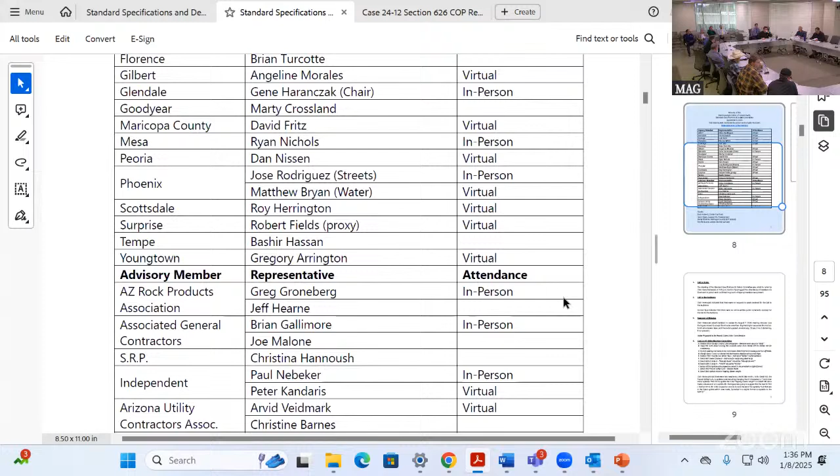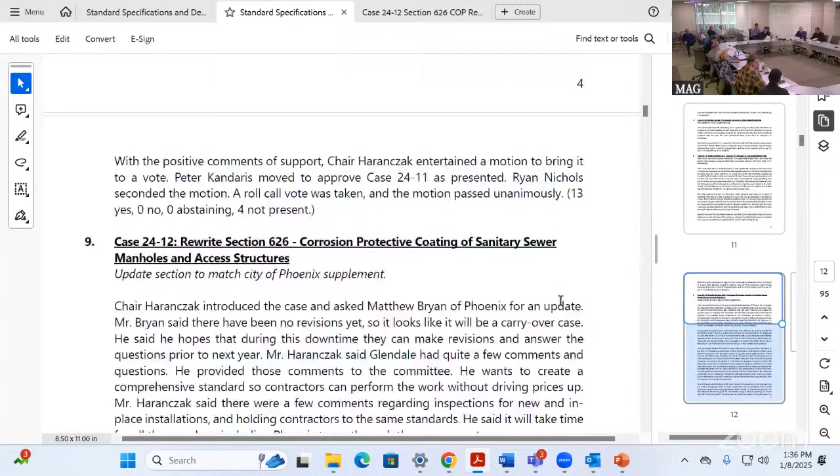Thank you, Gordon. It was brought to my attention that we do have a few new people that have never been part of this committee before. Robert Fields, are you on the line? Do we have a surprise here?

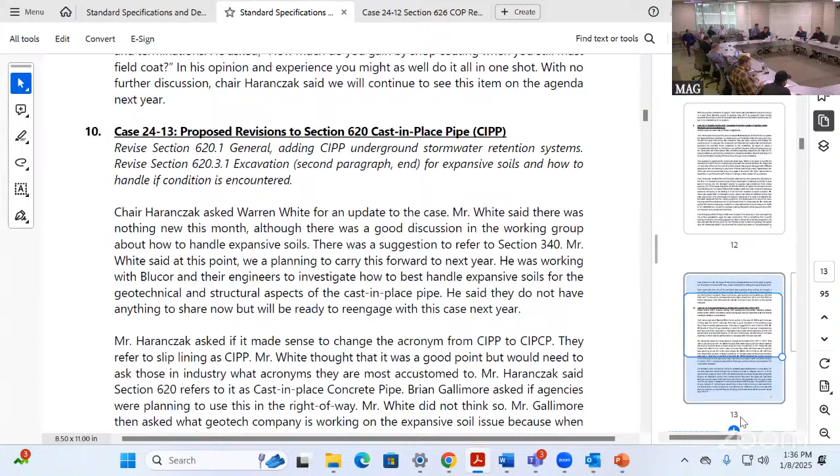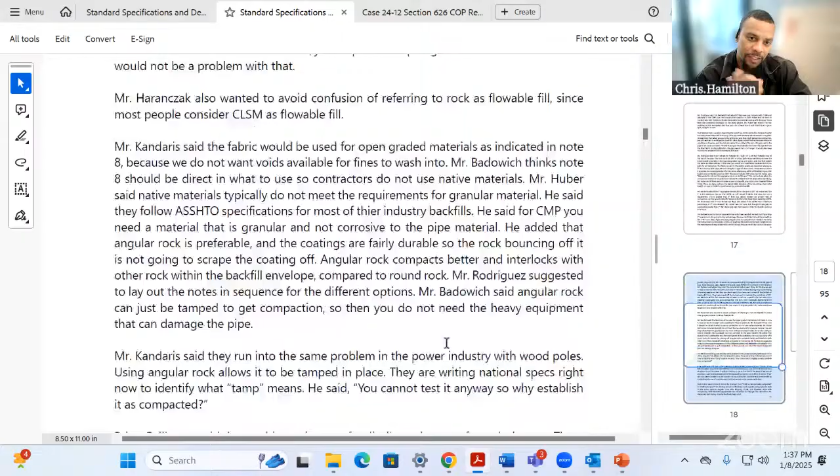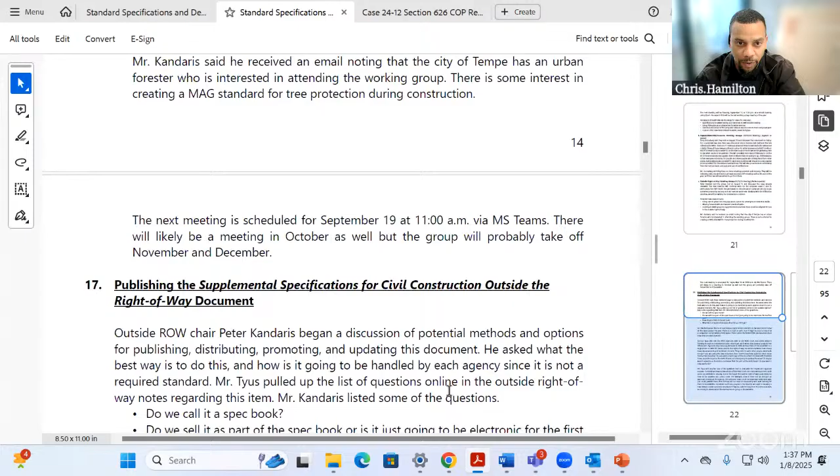How about Chris Hamilton with Tolleson? I am here. Chris, you want to give yourself a quick introduction? Sure, I am Chris Hamilton, city engineer here at Tolleson. I've been here about 3 years, but I've been around the transportation engineering community for quite some time. Previously was not a part of this committee, but worked closely with Mr. Badowich, who's been on this committee for quite some time. All right, thank you, Chris. Welcome to the committee. Thank you.

And then Arvid, you have an alternate, I believe. Robert is your alternate. Does that ring a bell? Robert? That's me, yeah, I'm Robert Pizzorno. Robert, you mind giving yourself a quick introduction? Absolutely, my name is Robert Pizzorno. I'm the Government and Community Affairs Manager for Tilson. We do fiber optic cable deployments, but I also sit on the board of AUCA, and that's who I'm with, Arvid, is AUCA representing that group. Great, thank you, Robert. Welcome to the committee. Thank you.

All right, hopefully everybody had an opportunity to look at the meeting minutes. Are there any corrections or questions that committee members may have on the meeting minutes? All right, hearing none, I'll entertain a motion to approve the meeting minutes as written.

Mr. Chairman, Jose Rodriguez, I move to approve the minutes. Thank you, Jose. How about a second motion? Mr. Chair, this is Warren White, I will motion to approve as well. Thank you, Warren. All right, we'll move into a roll call vote.

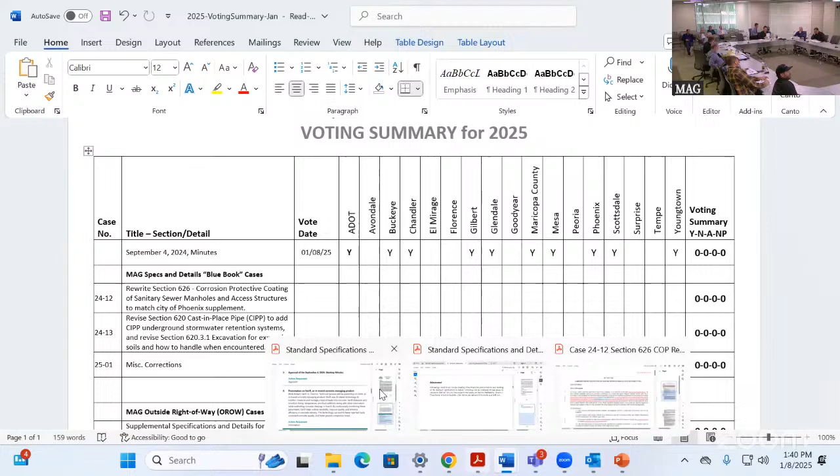Looks like the motion passes unanimously. Thank you, Gordon. Thank you, everyone, for attending this meeting, I appreciate it. We're going to move into agenda item number 4.

This is a presentation on Verifi in-transit concrete management product. I'll go ahead and I'd like the Verifi guys to go ahead and introduce themselves, or whoever's going to be providing the presentation. Good afternoon, everyone, my name is Mark Roberts, I'm the Director of R&D for Verifi.

Can you go to the next slide, please, Gordon? And the next one, we'll just skip that. The reason why is that the realities of concrete quality control are very difficult, right?

So what you have on the screen here is the new bridge that's going over the Hudson River in New York City, or north of New York City. It was a huge project. 182,000 yards of concrete was poured. This project actually won an award for its QC program, testing 1 out of every 20 trucks for how good the quality of the concrete was. In general, that is an exceptional amount of testing done on concrete.

So the idea for Verifi was to make it so that you could increase the amount of testing you were getting, the amount of information you were getting on every single load of concrete, instead of relying on spot checks or even a dedicated QC program. What that allows you to do is have more information across all of the loads of concrete, and know exactly what's happening to everything.

Just go to the next slide, please. So the idea there was to build a computerized system that you would mount to a concrete truck that would basically monitor, measure, and manage said concrete. Monitor would be like where it is, how fast the truck is going, GPS, that kind of thing. Measure was the complicated part, in that you are actually measuring the quality control of the concrete.

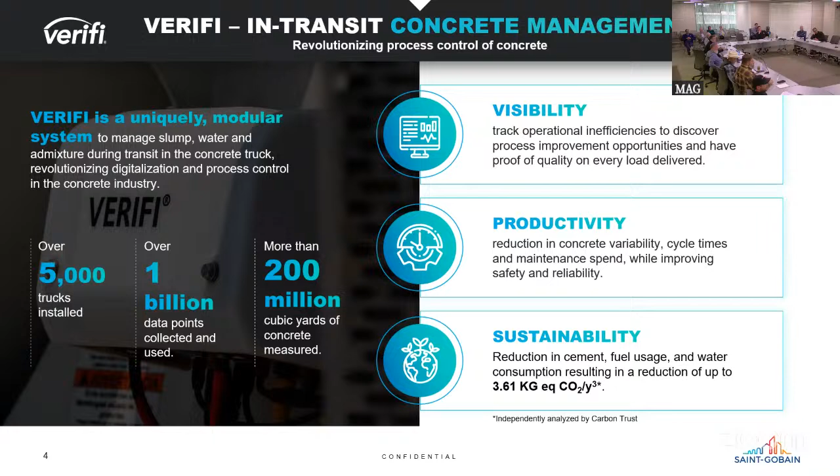How we did this was we built a system, like I said, that is a computer on a truck that is outfitted with many sensors to measure the quality of the concrete. Those sensors put out outputs, and it's connected into other systems that our concrete producers already have, like batch and dispatch. Basically, the recipe of the concrete is being given, and what is being made is on the top right-hand side.

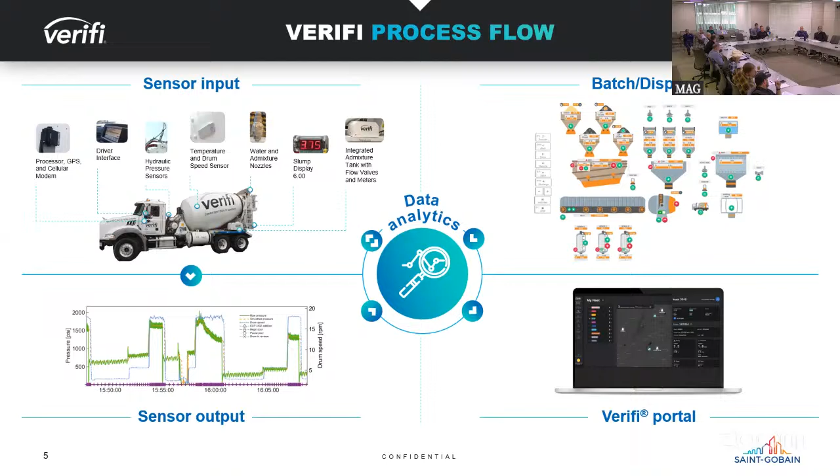And then you're actually using the system to measure what's actually happening when you make that recipe. Currently, they make a recipe and expect it to taste the same every single time. And we all know, as anyone who's cooked a meal, it's not always the way it works. So this allows you to test effectively every single load of concrete. Just go to the next slide, please.

So, like I said, it measures and manages concrete. That measurement was a difficult thing to do, but managing is also very difficult. What that allows it to do is add the correct amount of chemicals or water needed to make that concrete hit specifications. So having the ability to add those fluids on board allows you to have complete control.

Instead of making concrete and then shipping it and having it delivered, you are making concrete the entire way it's being delivered to the job site. So it extends the time at which you can affect the concrete's quality all the way to the job site, and then on the job site until it actually pours out.

Why you care about that is traffic can be extraordinarily variable, and concrete has a very low shelf life product. Think of concrete as a shipping industry with a product shelf life of about 90 minutes. The difference between 5:30 in the morning and 7:30 in the morning on traffic around here, at least in Boston, is a ridiculous difference. So you're shipping from the same plant to the same location, and it can change the timing and therefore the quality of the concrete.

If you can manage it the entire way, you're affecting that concrete all the way to the job site, and you're having the same quality every single time.

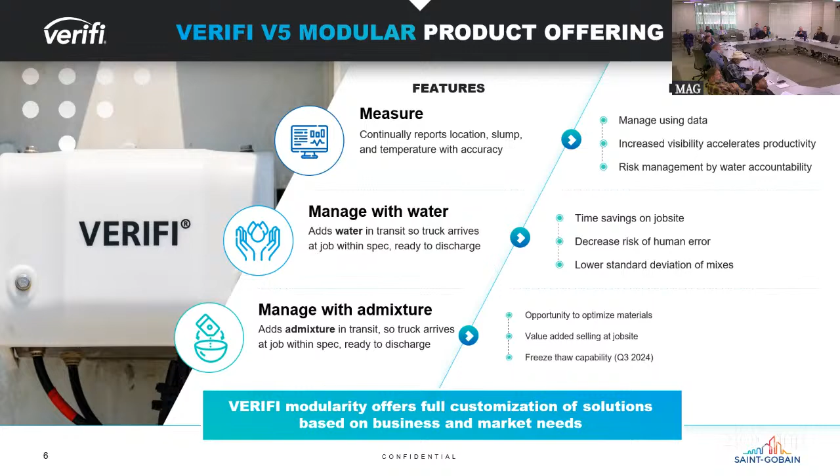Make sense? All right, this is the systems that are on there. We have...

Two different displays. If anyone's seen concrete being poured recently, there's a lot of trucks in the Phoenix area that have the system on there. If there's red numbers on the back of the truck, that's the Verifi system, and it's giving the display already. We have a display for the driver so he can interface with the concrete after he's arrived at the site, so he knows what's going on, and all of that information is collected and sent to the cloud so others can look at it. Anytime, anyone can look at the quality of the concrete across history, whether it happened two years ago or is happening right now, they can see it.

Go to the next slide, please.

So this is where the super nerd in the room gets going a little bit, I apologize. This is where it gets a little exciting. To do what we're talking about, you have to use this idea called rheology. Rheology is basically the study of how materials or liquids move.

Concrete is getting much more complicated. I'll say that as someone who's been in the concrete industry a long time, because we're trying to do really new things with concrete that you couldn't do before. You can do underwater concrete, you can easily get 10,000 PSI that when I started would be very hard to do. And you're trying to get more sustainable, so you're reducing cementitious contents or replacing them with other supplementary cementitious materials. All of that means the level of complication is increased dramatically.

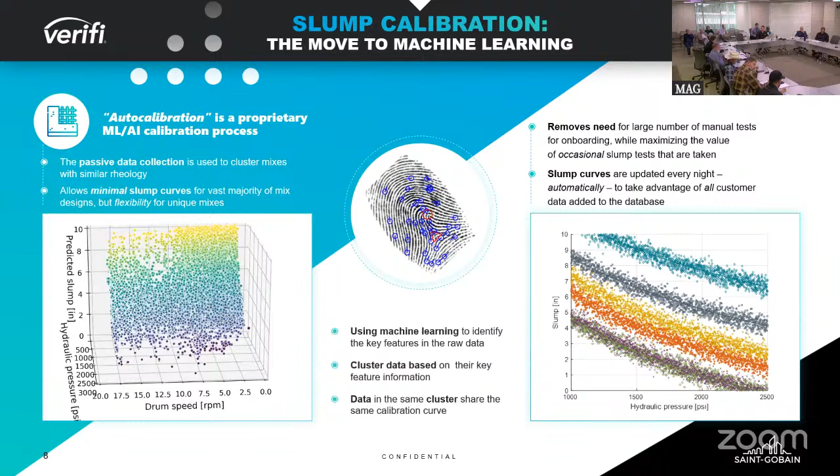Right now, how concrete is managed is the slump of the concrete, which is how the fluidity is consistently going down. So what they'll do is they'll bring the fluidity really high, and then they'll let it drop, and hope it's within target when they arrive on site. And then they pour out.

Or they'll add water, or they'll add chemical, and then they'll pour out. When you use Verifi, it's a very different idea in that since you have that whole time of being able to affect the concrete, you bring the concrete slump up, and then as it slowly starts to drop, you add a little bit more fluid as you go. So you maintain it, so it doesn't matter how long the commute is. It's always right from the get-go.

And once you have that data, you can actually start to look at how, when you're too high and when you're too low, and all things like that. But that reduction in variability basically means that what you're putting into the structures that you're in charge of, you have complete control over what it is. And it comes out as it's designed to be every single time.

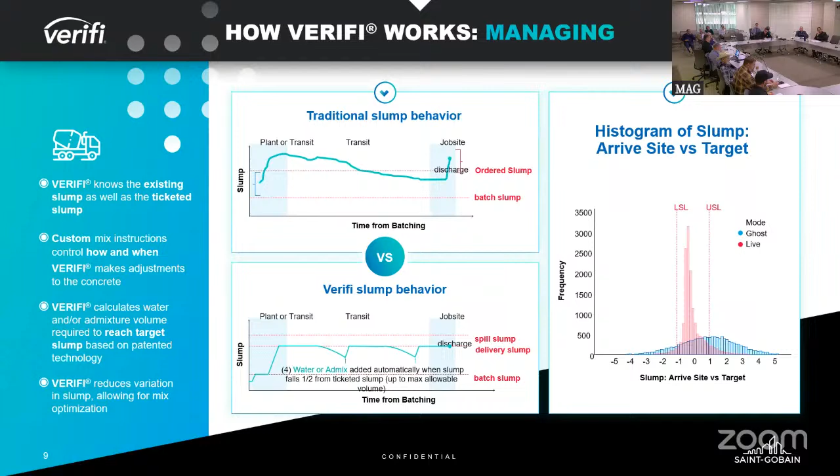Next slide. I've been in this industry for a long time, but I'm at an interesting intersection here, where we have material scientists that work for Verifi as well as IoT people. So that's like data nerds and material science nerds. And we also have people who have been working in the field, like the people in the back of the room, who know concrete really, really well and what our customers need. So putting those three things together was what launched Verifi to be able to actually do what we do.

Now I will say it has completely changed because of the amount of data that we have. Machine learning and all those things that you hear about AI and all the stuff that you hear about in the world, it relies on data as oil. Machines don't run without oil. AI does not run without data.

We are producing that data to be able to make the systems better every single day. So it automatically feeds, and every single night it's actually updating how to measure the slumps on every truck that we have it on. It easily does it with no human intervention. It's learning and it's fixing itself every single night.

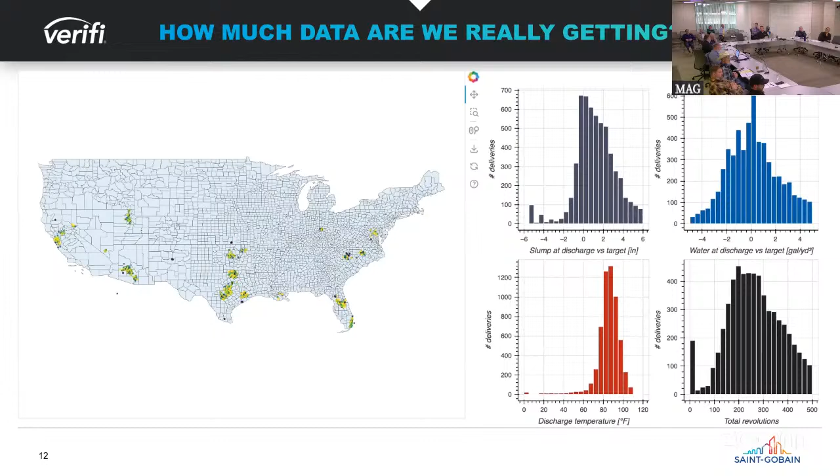So they originally wanted to test every single load of concrete for slump. And that was causing them to have a long time because they had to have testers there doing these tests for every single load. And they had to throw away a lot of concrete. This is a really big project.

In wheelbarrows of concrete, they were going to throw away 18,000 yards of concrete individually pulled off, which is a lot of material waste, a lot of CO2 waste. So they contacted us to ask, can you replace this physical testing with a machine? This is where we already had the system, so we worked with them. Now we're no longer testing every single load of concrete, they're testing every 20th load. So they've gone to 1 in 20, the same as the Mario Cuomo Bridge, but they have the other 95% of the information already in a data source they can trust and use.

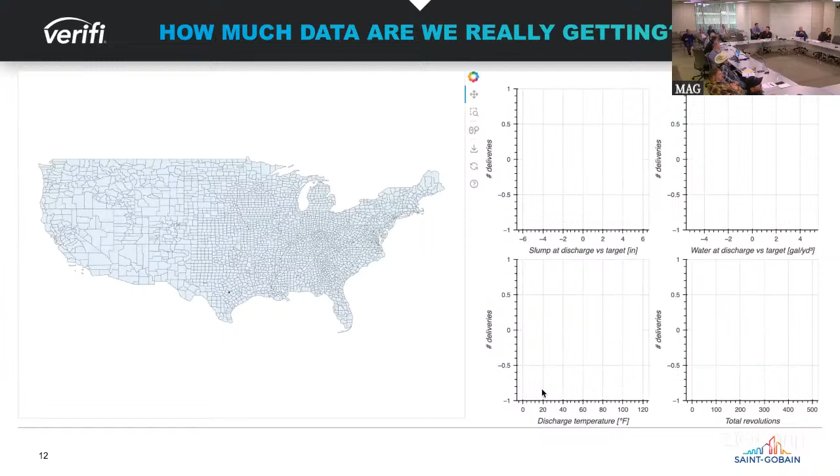I was told to keep it to 15 minutes. That is 15 minutes. Well, I'd like to grant you some time to discuss the one slide about slump. You said something about nerding out on slump. Yep, go back up one more. You intrigued me with that.

This is the ASTM used to measure slump. There's a precision document that comes with that. Basically what this is saying, on the bottom right-hand side, is a multiple laboratory precision. That means if two people pull concrete from the same wheelbarrow, not the same truck, that is the difference they're allowed to see between two results. It's called the D2S limit. The fancy way of saying 95% of the time you'll be within 2 standard deviations, and the standard deviation is on the bottom left-hand side. What it's really saying is if someone pulls a 6.5 inch slump and someone else pulls an 8, that is an acceptable difference between the numbers.

I bring this up because what happens with us is we are a digital display and it says 5.25 on the side of the truck. And then someone pulls a 5 and they say, you're off. And I say, well, no, because who's off? One, is it off at all? There is no such thing as a difference. So that basically shows there is no technical difference between a 5.25 and a 5. That's literally measuring this much out of a 12-inch cone. So it's not a big deal. I bring this up a lot just because it does allow for a lot of discussions to happen.

What I will say is a machine is a machine. It's like the Terminator, it does it every single time the same way all day. Doesn't matter if it's 5 o'clock and it's Miller time on a Friday, or it's Monday morning, it doesn't care, it does it the same way every single time. Humans are, let's just say, less reliable.

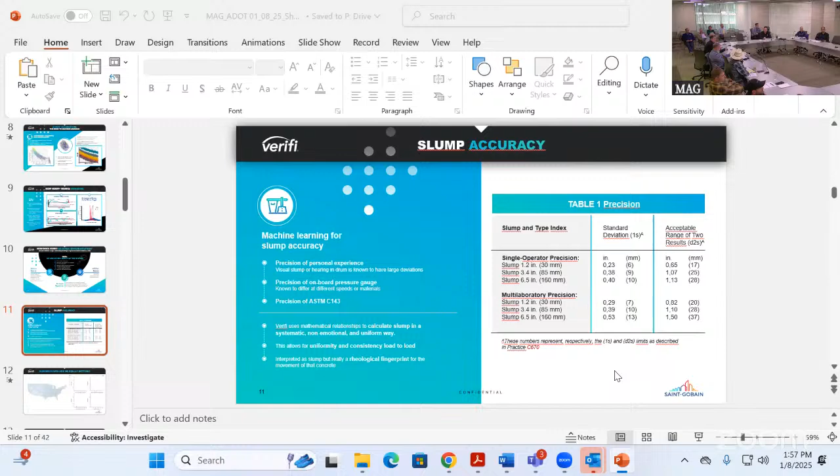We have APIs, so actually, if you go down 2 more slides, sorry to do that. We have APIs, which are basically how computers talk to each other, so you can just get the information that way if you need it. But there is also a slump display on the truck, on the side, and it says it right there, big, bold, 3-inch tall, 4-inch tall letters. It's a 100% replacement of the hydraulic slump meter. The hydraulic slump meter is a great idea that has a really big flaw, in that if you speed the drum up a little bit, that number moves. And then you have to say, okay driver, is it exactly at 3 RPM and all that? It's very, very difficult. So this takes that into account.

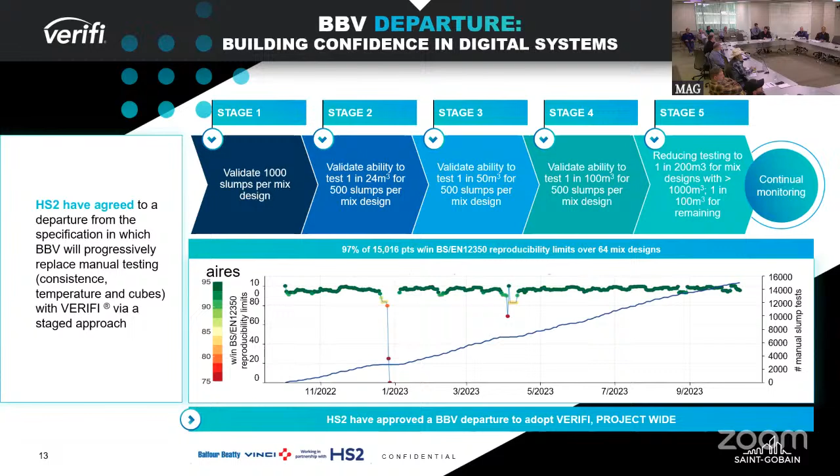The truck's displaying slump only, but all the other information is available through an app or through that supplier. To your knowledge, to date, in Maricopa County, what suppliers are using Verifi?

Cemex is using it. Arizona Materials is using it. Core is using it, and Desert Ready Mix is using it, and soon to be Rock Solid is using it. Some big names in there. Congratulations.

About 70% of the market is using it. The question was, what percentage of the market was that? And the answer is 70. My question is, how much more does it cost for the contractor?

It usually gets passed down to us, you know. So for one, we sell it to the ready mix producer. They usually save enough money without passing that cost on to others. There's a lot of value in operation savings because they have visibility across the entire operation, so they know which drivers are taking their extra time, things like that, so they can save a lot of money in both operation times and in quality control.

So you were talking about adding additional fluid and whatnot throughout. I assume that's during transit, you're adding fluid? Yep, and it's automatic, so it's an autonomous system, the Verifi will add the admixture or water that is required in transit while it's driving. The trucks can have that.

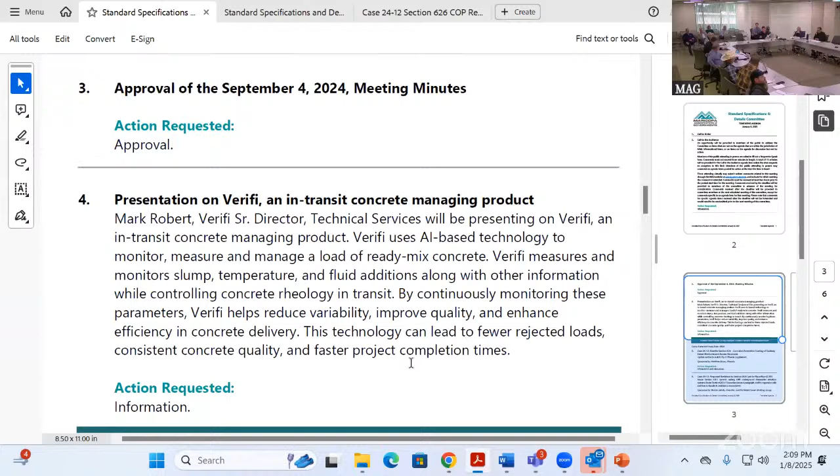All right, we're going to move into agenda item number 5, cases carried forward from 2024. Case 24-12 was to rewrite section 626 for corrosion protective coating of sanitary sewer manholes and access structures. This one was being sponsored by Matthew Bryan from City of Phoenix.

Matthew, you want to give an update on this case? Good afternoon, Mr. Speaker, I have Pat Womack on, he's going to do the update here for us. Great, thank you Pat, the floor is yours.

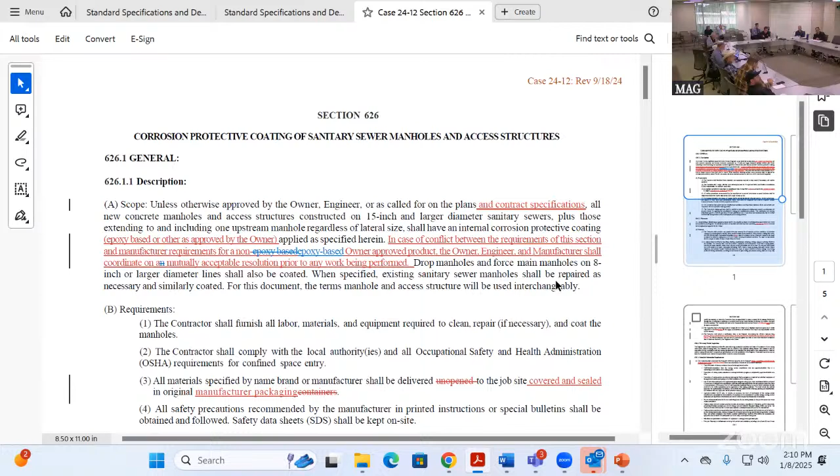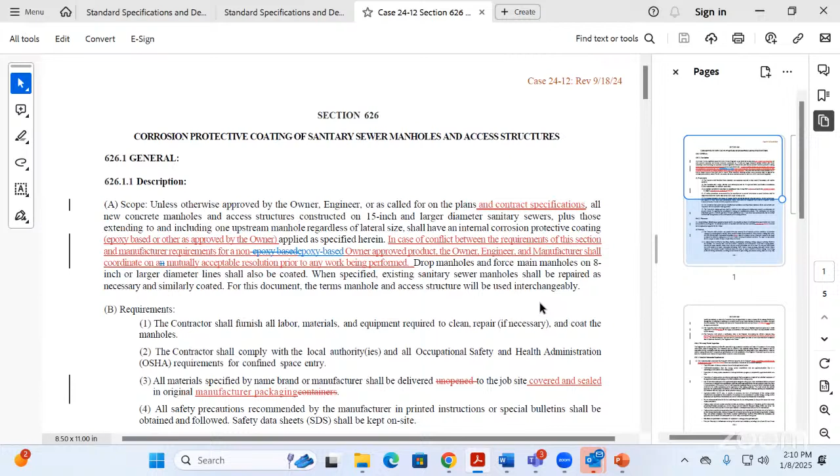Good afternoon, can you guys hear me okay? Yes. All right, perfect. We took all the comments that were provided back to us and implemented the minor changes in the specification, so we're hoping to move forward with getting this up for a vote to be implemented to replace the existing 626 spec.

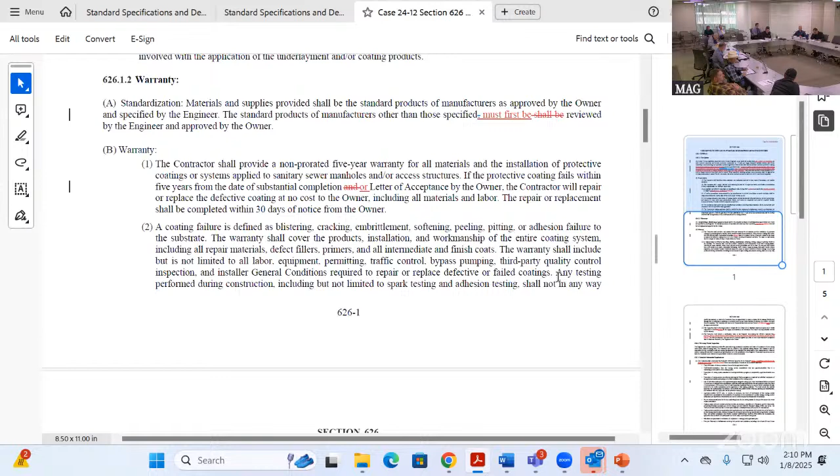Pat, I appreciate that. I know you took a lot of our comments into consideration from Glendale, from my staff. This has been in front of my staff, I've gone over the latest and greatest modifications you guys provided. I appreciate it, I think it looks good in my opinion. I'd like to get some other feedback from other members of the committee before moving forward with putting it up for action.

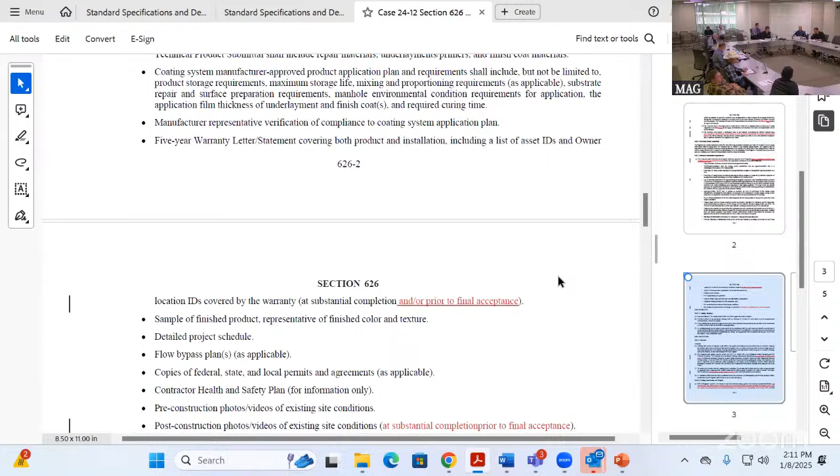So at this time, has anybody else on the committee had any comments or questions regarding the section 626 revision?

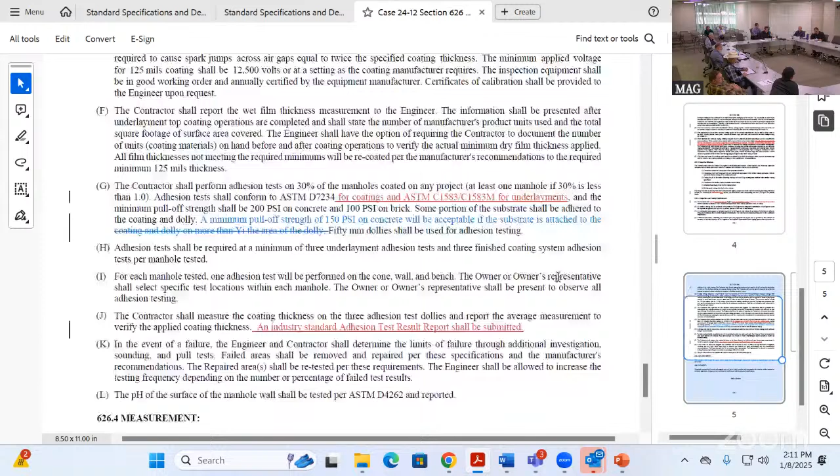I'm not hearing anything. So what I would suggest, Pat and Matthew, is that we put it up for discussion at the next meeting and possible action. Gordon, can we put it on for possible action next meeting? Yes, I can do that.

Yeah, so that'll kind of start the clock for getting it voted on, and it'll really put the pressure on everybody to go over it and make sure it's good the way it's written, or they're good with it as written. So we're going to go ahead and put it up for discussion and possible action for next meeting, next month.

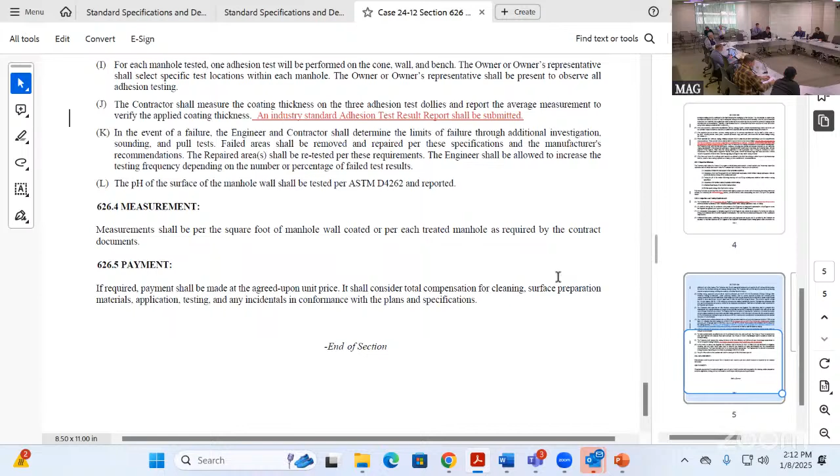Perfect. Thank you, Mr. Speaker. Yes sir, thank you Matthew for putting the work into this, you and the City of Phoenix team.

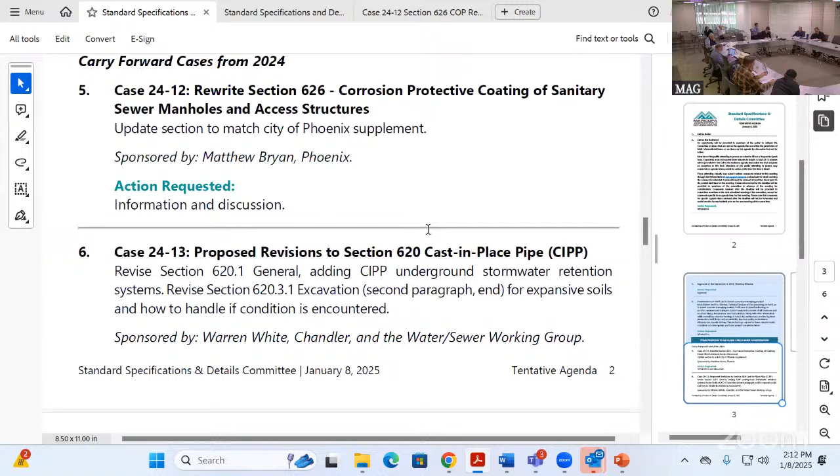All right, we'll move into agenda item number 6, case 24-13. This is proposed revisions to section 620, the cast in place pipe, which right out of the gate we need to switch. We talked about changing that to cast in place concrete pipe, correct? Because there's a little bit of a discrepancy there.

I guess before we get into too much of that, you want to go ahead and give us any updates on it, Warren? Sure, thank you Mr. Chair. Yes, as mentioned, I think in our last meeting before the break, we agreed that we wanted to use the acronym CIPCP.

CI, cast in place, CIPCP. CP, that's right. We already have cured in place pipe, so it's not going to be confused with that. So it sounds like there may be some additional changes in order to accommodate that throughout various specs.

And we talked about maybe having that added, which we'll probably talk about in the miscellaneous corrections, right? Yeah, possibly we could put it there. Let's talk about that when we get there. But also, in the abbreviations, we'll have to make a correction there.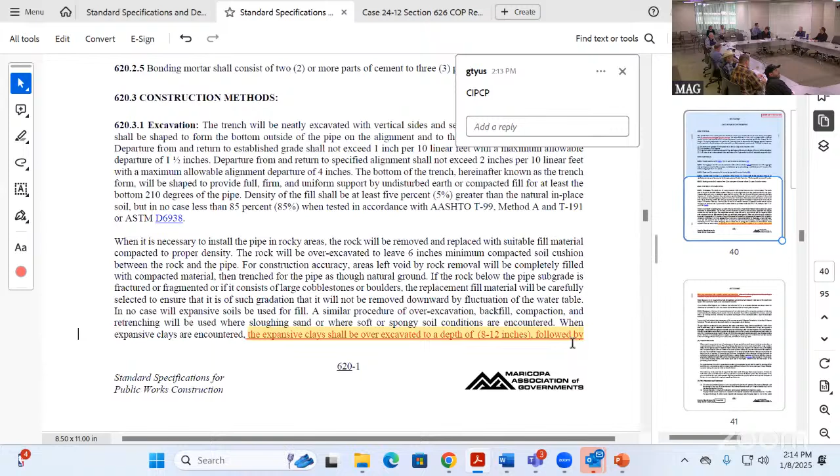Correct. Okay, so there'll be, as you discussed, with the change of the acronym, it's gonna generate some other modifications in various parts of the publication. And I can put that together for the miscellaneous correction if we agree to that. Yeah, I think we could probably move those little minor corrections over to miscellaneous corrections. Yeah, that'll work.

Okay, and then moving on, the definition for cured in place pipe, because it is mentioned in MAG 610 for extra protection. That's the only place it's mentioned. But we'll go ahead and do a definition for that, probably under miscellaneous correction also. I think that's fair. We'll put that up for miscellaneous correction then.

All right, thank you. All right, going on. Just kind of a real quick recap from this carry forward case from last year. It was introduced, working with Blue Core, as an update of this spec, since it has been used for quite some time for underground storage, retention systems.

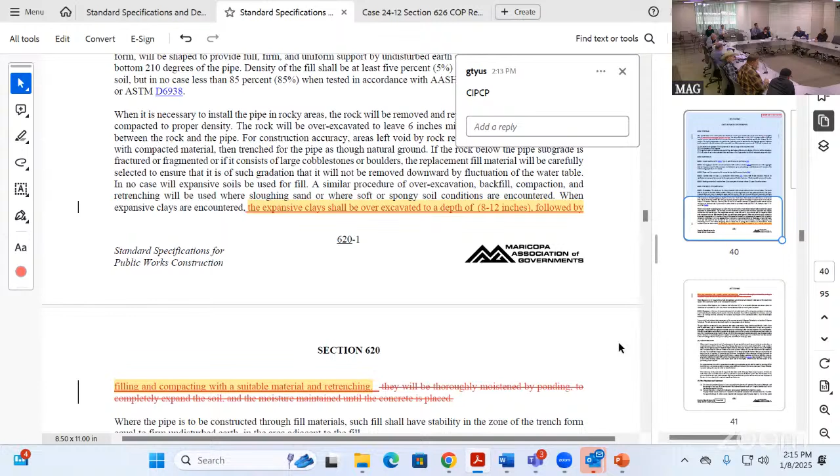So that's where it began, just kind of updating the general section. And then we kind of got into looking at the spec beyond that, just to make sure it was all current to today's practice. And then we got into the fact that we really aren't thoroughly moistening the expansive soils, and there's some practice there that we agreed wasn't part of the current practice. That led to some more discussion about how to handle it if you do encounter expansive clays.

So we had added that statement there, which led to more discussion in this forum and in the water and sewer working group, where Blue Core reached out to a geotech and an engineer to get a little more feedback, and worked with City of Phoenix too on their comments to make sure we're all on the same page there. So at this point, we've got the comments from the geotech basically about the overburden and our types of clays here, and history with Blue Core. They haven't encountered any problems with that.

And the geotech's determination was that the expansive clays here really aren't enough to overcome that overburden, right? Correct. Yeah, the concern that I had brought up is on shallow applications with that granular backfill material -- if you don't treat the expansive soils underneath the pipe, is there potential for movement after the installation?

And that's what the geotech, I think, Alpha -- I think so, yeah, I have that somewhere here -- he provided a comment that based on the soils that we have here in the valley, that may not be a concern. We don't have something that can provide that much overburden to move a piece of pipe with 2 or 3 feet of fill on top of it. So it's lazy soil, it's not as active.

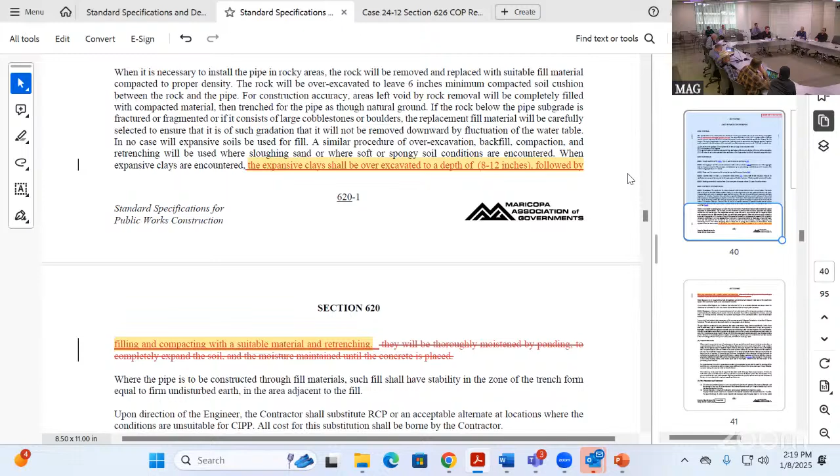You mentioned that you were going to talk to Blue Core. Juarez is also doing the cast in place too. I believe they bought the system from Blue Core. Oh, okay, so Juarez, right? Any which way, but they're also doing cast in place too. They have a project right in Glendale that they're doing, not too far from the stadium, I believe. Who's the contractor? Juarez is also doing cast in place, they're doing it underground. It must be on-site land development. Yeah, it is. So, good to know, just in case you want another reference. That helps, thanks.

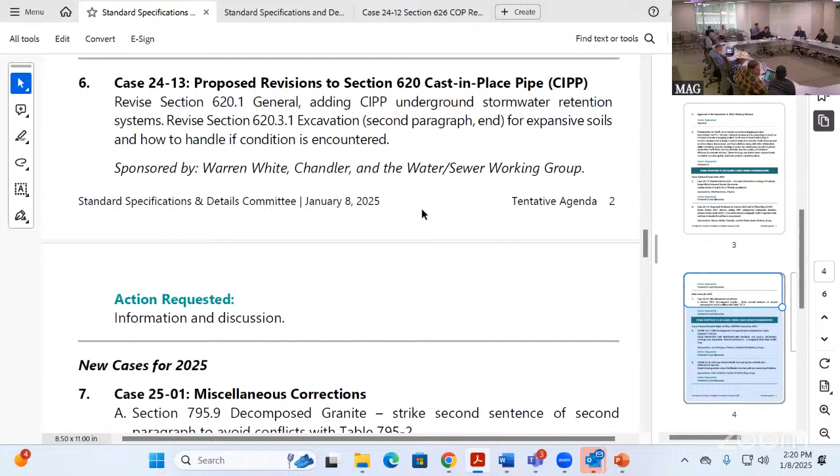All right, Warren, thank you for that updated update on 2413. We're gonna move into new cases for 2025. You should have seen in your packet that there was a correction that was requested.

I think that was requested by Logan Simpson Design. That's ring a bell, Gordon? Yeah, we had some questions just from some contractor, a landscape contractor, and Wayne Colbank with Logan Simpson, who wrote this section originally, provided some feedback, and so that's what we have here. And I believe he also emailed Peter about this. So Peter, you want to give an update on, give some background information on this correction for the minor modification?

As I understood from the email, the question came on talking about the specifics of having particle sizes larger that may be utilized if they're broken down during the rolling process. And the question was, do we need to have that if we've got a sieve? It is what it is when you get it delivered. That was my understanding of what they were saying. Generally, if you get a sample and you take it to the lab and you get a sieve done, it will normally break it down anyway, so the material is what it is. You're not looking for a clump of stuff. So I would consider it unnecessary information as long as the material already had been pre-qualified. So the sentence in question is: particles larger than 2 inches, which will not be broken in the process of rolling and tamping during construction, shall not be used.

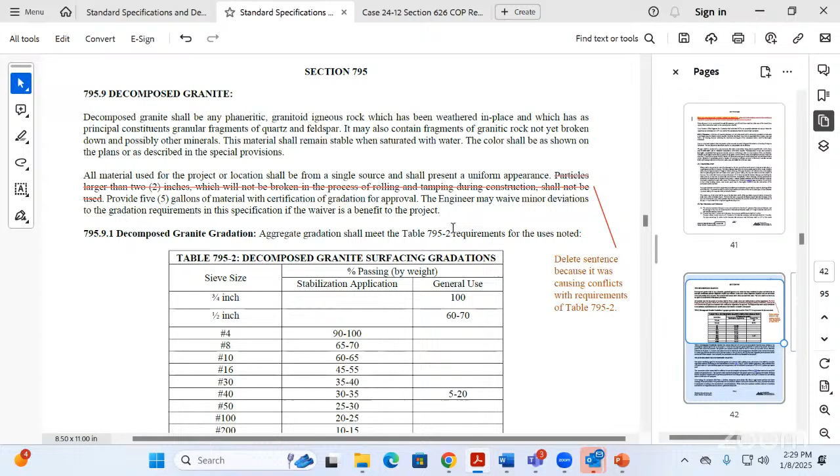It sounds to me like, as noted by both Jeff and Peter, we're just guessing here, but it seems it may come in as a conglomerate and not necessarily a sound piece, held together by whatever clay or calcium, and it would break simply under rolling. That's what it sounds like it was put in there for, but I wasn't there when it was written. I'm just guessing, but in my opinion it could be deleted from the publication to avoid any confusion in the field.

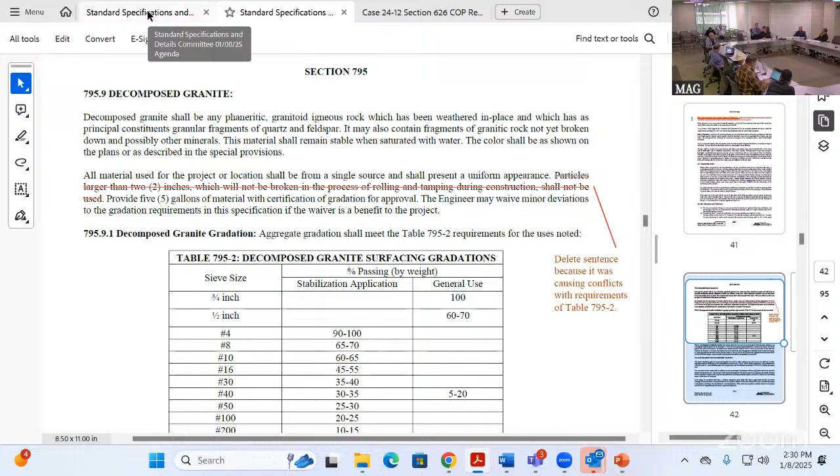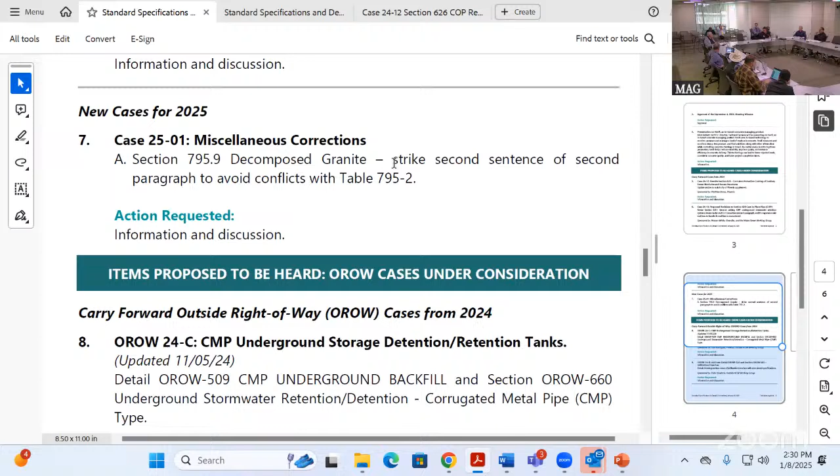That's why we have specifications. If you think it's acceptable material, take the sample, take it to the lab, get it tested. Questions answered. There's always going to be disputes in the field about whether the material meets spec. I can't look at most gradations and say yes, it meets the standard without taking a sample. So why would this be any different? Right, fair enough.

Any other questions or comments from committee members? Okay, hearing none. Gordon, I will be sending you an email for additional miscellaneous corrections between Warren and I. We'll get that figured out for the different sections regarding the CIPP and CIPCP for those changes. Sounds good.

All right, we're going to move into carry forward outside of the right-of-way cases from 2024. This is agenda item number 8, CMP underground storage detention retention tanks. Jose Rodriguez, you got an update on this one?

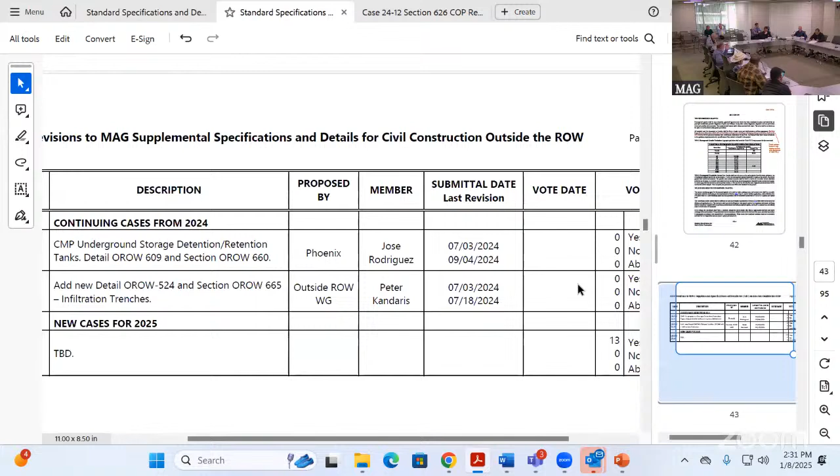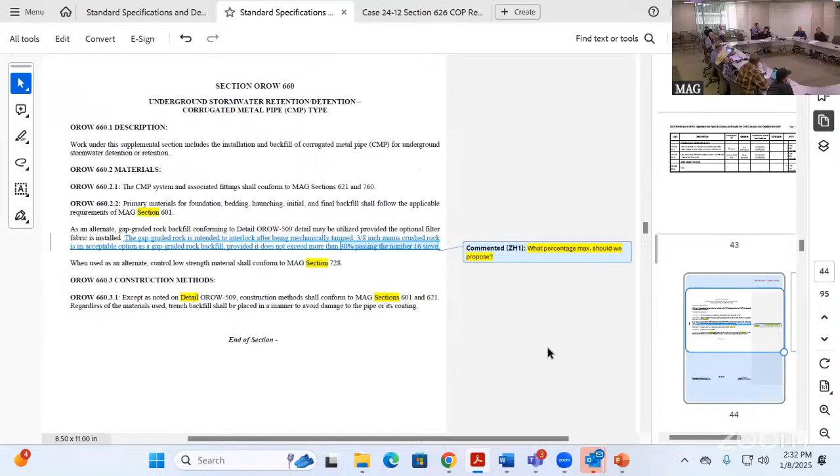Yep, thank you Mr. Chairman. Last time we presented the case, before we went on break, we had a lot of discussion about the gradation requirements we have, because there are 3 potential options for backfill on these systems. Just to go over it once more, we have the normal granular backfill material that has to be compacted where you can take a test, but we clarified a lot of the notes on these revised details to provide the 2 alternates that are probably the most used right now.

Which is more of a gap graded rock material, as well as CLSM, which we condensed the language on. The main issue we struggle with between myself and Zach at Contech, who's moved on, but there's somebody else for Contech helping us close out this case, is the maximum aggregate size called out on the national ASTM and AASHTO. It makes reference to a 3-inch material, and I know that sounds like a bad idea to think we'll have a lot of 3-inch rock. The only thing is we haven't come down to an actual maximum size determination because we don't want to rule out all the potential options.

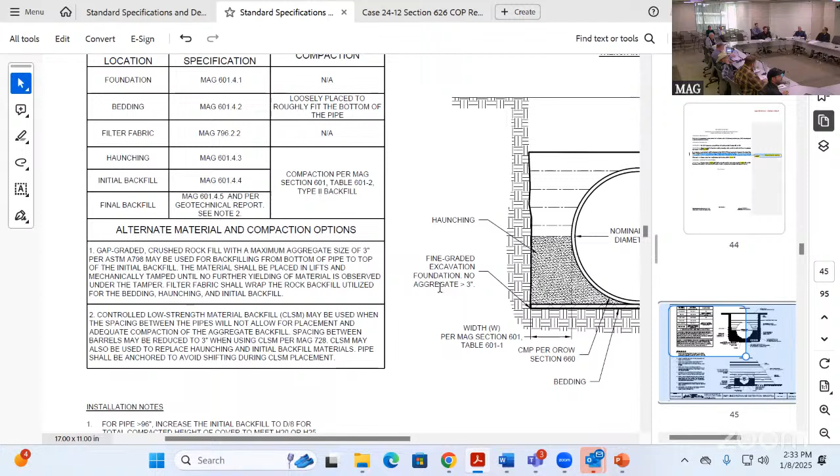I think from our discussion last time, the current standard is like rejected 3/8-inch chips, but that doesn't mean other stones might not work out better. So that's where we wanted to bring it up to the committee and see if we can also have more discussions at the outside right-of-way working group. We just wanted to present this detail again, because we did clean it up quite a bit to remove a lot of the different installation notes that talked about backfill in different places, to make it a little more condensed.

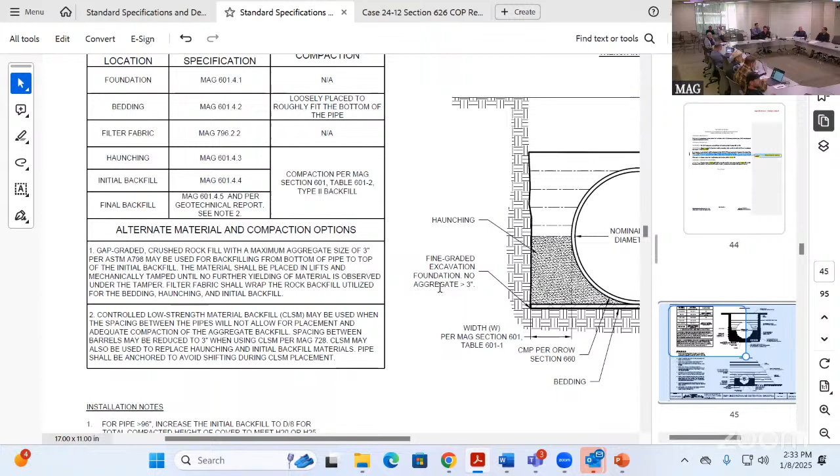But I think the biggest thing we have to work out now is how do we want to define, or how to best define, that rock gap graded material that can be used as an envelope, as a backfill envelope. In some of the other suggestions that came up last time, there is an accompanying specification where we specifically call out the use of 3-inch minus gap graded material that is allowed. We talked about that.

We were having a hard time finding a name for it because we didn't want to call it rejected chips, and there's no such thing as a standard gradation for that material.

But I mean, it's an industry standard. You know, it's always been called 3/8 chips. If you call them that, they know what you want, right? Yeah, but that's where we're having a little bit of a harder time.

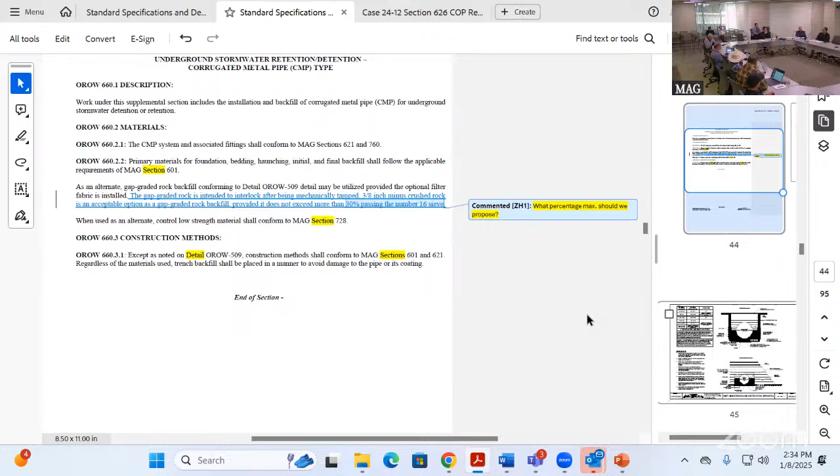I don't know if Jeff has a better way to address what that material is. Yeah, how do you specify a non-specific material? I was actually hoping you weren't going to ask me that.

While Jeff's thinking of a clever response, is this a carryover case from 2411? Yes, but was this initially in the regular mag book that we moved over to outside right-of-way? No, this has always been outside. Okay, I'm trying to get the cobwebs out.

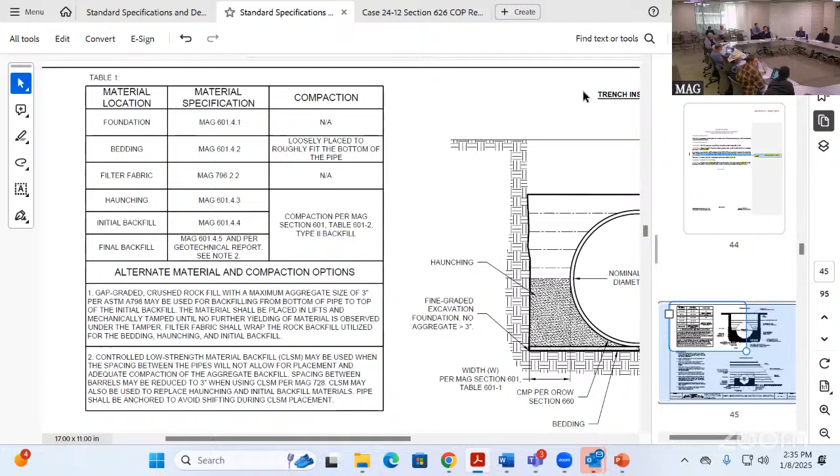We had a rough start here the new year, so. Yeah, so that's what we're presenting it for information and discussion. Again, it was a carryover case, we've had a lot of discussion about it. I think this version is obviously a lot cleaner. I think we'd definitely appreciate anybody's input on how to best define that.

Yeah, I think that's really about the last major item left on the list. And the reason it's kind of broad is we had some discussion, Peter, where you mentioned that in the utility field, they're using other kind of more interlock material, rock, plus backfill as well.

Yeah, I mean, it's an ASTM, and the whole concept is to try to grab something that's already specified that you can use. But here we've got almost a unique problem. It's a well-produced material that is hard to specify, but we know it's useful. The ASTM for this particular application for installation of pipe is pretty broad, it just defines backfill as an acceptable 3-inch minus material.

Now, maybe I'm off base here, but how about something of the nature that it's gap-graded rock approved by the engineer, since we're not able to put a gradation or anything on it.

Well, it's hard with the guys that are producing the pipe, making the pipe. They won't specify, they won't take any liability to tell what to put in there. Other systems, maybe not the same system, but like ADS StormTech, those kind of things, they've been using 57 rock or number 4 rock as the approved rock to go over that.

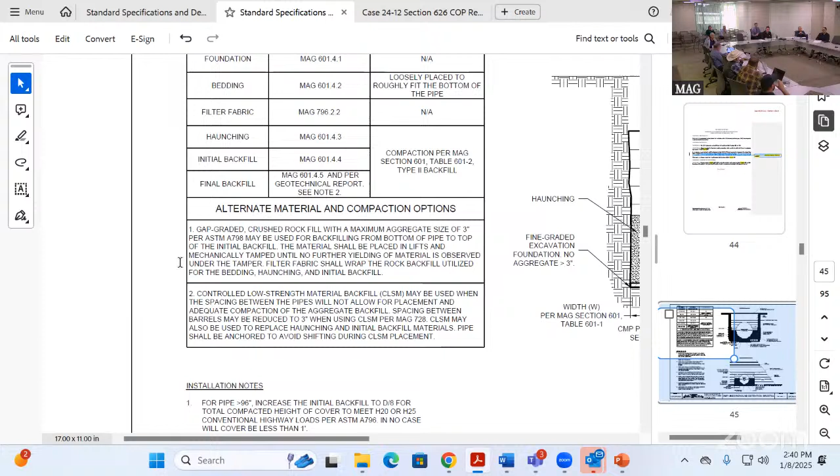Mr. Chairman, if I might comment, this is Mark Taylor with Contech. I just want to respond - the recommendations for the backfill envelope around CMP, we absolutely support using the same material from the bottom of the pipe to a foot over the top of the pipe.

As the gentleman mentioned, one of the issues in the past has been that the requirement for high quality select backfill was only required up to the spring line, and then it was basically native material used above that. We don't feel that's a suitable application for the pipe. It really needs to have homogeneous material throughout that entire backfill zone, as is shown on that detail now. That's an improvement there, yeah.

Is that for support of the pipe, or is that for corrosion? Well, it can be a combination of both, but whatever material is used should be tested for corrosion potential and to verify that it is within the allowable parameters for the metal pipe and the coating that's used. But it's obviously very critical for proper structural performance as well.

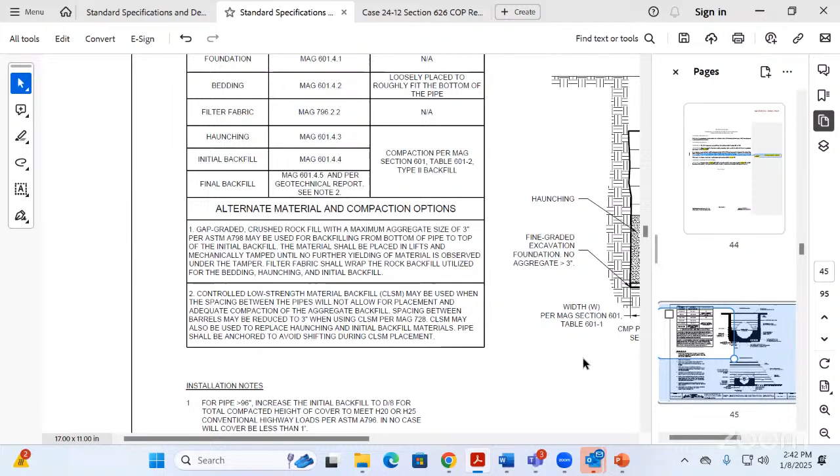All of the national standards will delineate the select backfill zone as that area from the invert of the pipe to about a foot over the top of the pipe, and we certainly agree with that method. As Jose mentioned, the detail shows that appropriately now, even though the cross-hatching just identifies the haunch area. But in reality, all of that material around the pipe would be the same material.

This does not allow native material to be backfilled above the haunch, does it? No, I didn't think so. The options refer back to section 601 - more of an AB type of material. Yeah, I think that was one of the reasons we did this, was to resolve that issue.

If you go into most national standards for design purposes, when you're trying to classify based on bedding types, it assumes it all the way to above the top of the pipe. So the split can be two separate materials, but both manufactured materials. Is that what I'm hearing? Yes. Can be, yes, but it should not be native material, compacted native, that I remember.

I would agree, and that's the corrosion issue. And we again have to handle the 3-inch minus material - if you call it now, it calls out a gap graded crushed rock fill, right? Yeah, so it has to be, it's not just your native material. Right, the 3 inch is just a placeholder until we define what that actual maximum aggregate size will be for the crushed rock.

Yeah, absolutely. But again, going back to it, do we just want to say 3/8 of an inch? But then that will take away your number 57 stones and stuff like that.

Mr. Chairman, if I might, this is Mark Taylor again. Yes, sir, Mark. Trying to come up with a way to define these coarse aggregates.

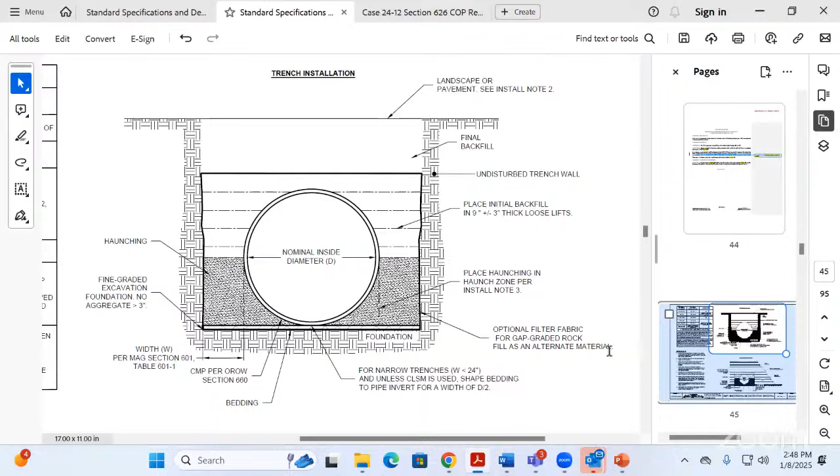Yeah, because in those cases, for that particular project, you would use the CLSM option. Right, you wouldn't be able to. I think we're talking about future options, being able to expand to other options, which would then be an adaptation or a morphing of this spec to allow for that.

Let me wade in, just for a second. In your alternate materials and compaction options, you list ASTM A798. When I look at ASTM A798 under structural backfill material, it talks about granular material. Structural backfill material shall be readily compacted soil or granular material with no material retained on a 3-inch sieve. Select materials such as bank run gravels or processed granular materials, not a gap graded product. So there's a conflict there with the way we wanted to describe it.

The intent was to make sure we could easily talk about a 3-inch minus granular backfill using 701 select material. The base materials we have in 701, which is a 3-inch minus base, sub base material, we could easily use as a quantitative way to measure what material to use.

If you want to really use alternative materials that would be more crushed rock and get that interlocking kind of thing, I think you'd probably want something like 57, not tremendously large, but with enough crushed faces to get that interlock. Or even go smaller, 3/8, you get a lot more interlock there. You put it in place and you pretty much have whatever compaction you're going to get—there's not really any compaction force needed. It's going to be what it is when you get the interlock.

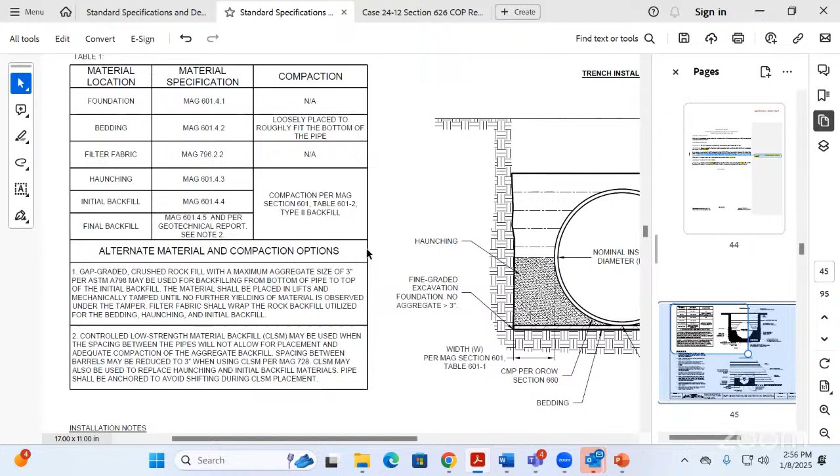Yeah, and I agree, it should be homogeneous too. That to me is a no-brainer too. Sounds like there'll be more discussions at the working group on it. Yeah, but this is good discussion, guys. Yeah, absolutely, get everybody in here.

One thing to note though, once we start, the price will go up. All of a sudden it's a commodity. One last thing: don't call it reject, call it something else.

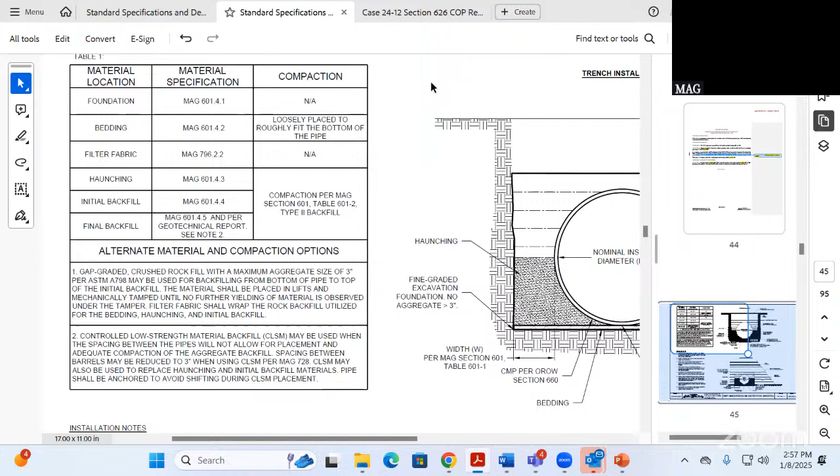I can't remember specifically on our detail, our Chandler detail, but did we have the filter fabric on top of the pipe just to protect the pipe somewhat too? Can you turn up the mic? I thought we might have had it laying on top of the pipe too. We call it a burrito. No, are you talking about the backfill envelope or the actual pipe itself? Right, this area too. No, right now it doesn't close to protect it. Correct, I was wondering on our Chandler detail. So Chandler had a detail that potentially had the filter fabric on top of the pipe, felt like it might have, to protect the pipe from the nicks and the dings and things like that, right? Gotcha.

It's all you. Okay, maybe not. All right.

I think what we're trying to accomplish here is to make something that's not going to be highly corrosive. It's going to resolve some of the problems. We can never resolve the inside issue, it can clean, but if we can resolve the outside, that should go a long way toward longevity. Well, yeah, because the less damage, and you don't want to get people down in there. I've had a track hoe fall on top of this stuff, and then it just crushes like a tin can or an aluminum can, and you got to pull it out.

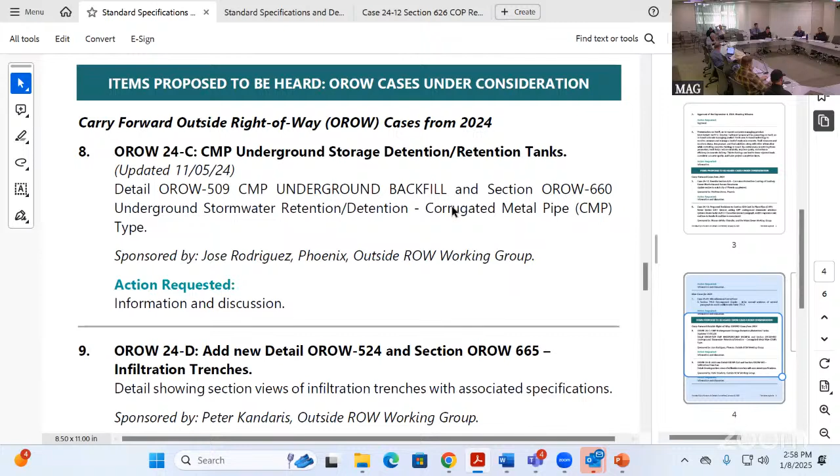It's too delicate. Thank you, everybody. We're going to go ahead and move on to the next item. The rest of this can be sorted out at the working group, but thank you for all your comments and all the feedback from everybody. It's helpful for sure. We're going to move on to agenda item number 9.

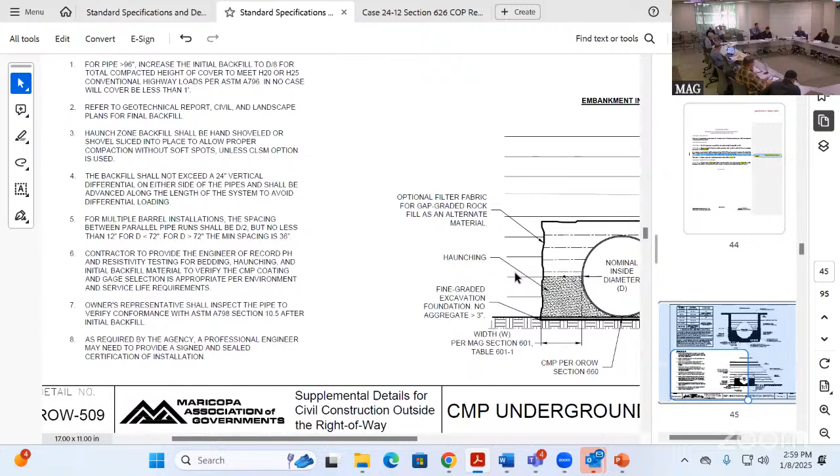This is the outside right of way, 24-D as in dog. This is to add new detail 524 and section 665 for infiltration trenches. This one's brought to us by Peter. Peter, would you like to give us an update? Yeah, thank you, Mr. Chairman. I have not gotten any new comments since probably the July, August timeframe.

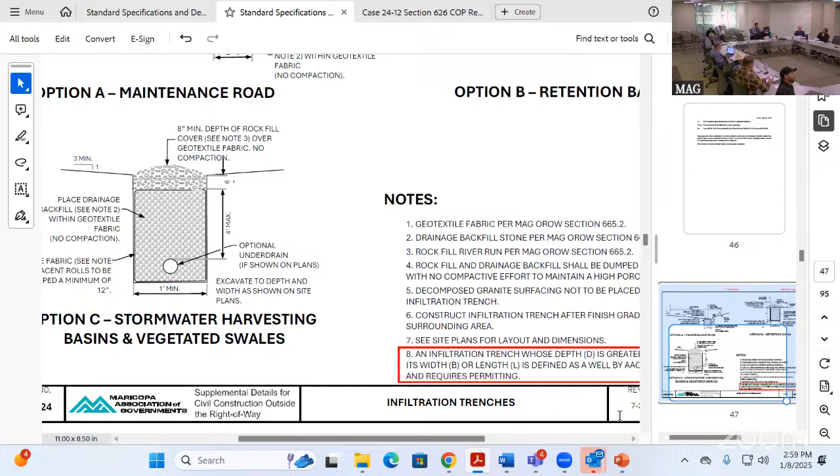Right now it's just in the process of redrafting now that I actually have the CAD system to redraw, and Gordon's been helping me. But at this point, we're still waiting for any additional comments, anything new to go on there. I think the July 1st date is the last revision we had. No new comments have been received.

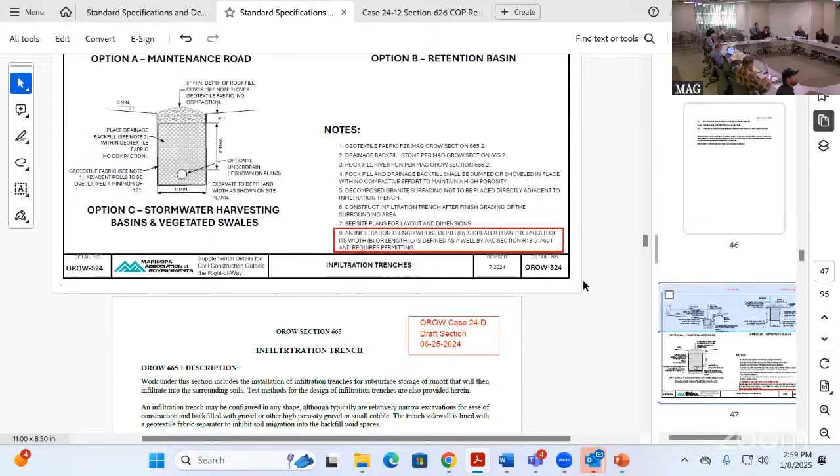But I can't believe I haven't seen it before. There's a typo in the specification name, on the spec section. Oh man, I've been spelling infiltration wrong this whole time. That's me and my fat fingers.

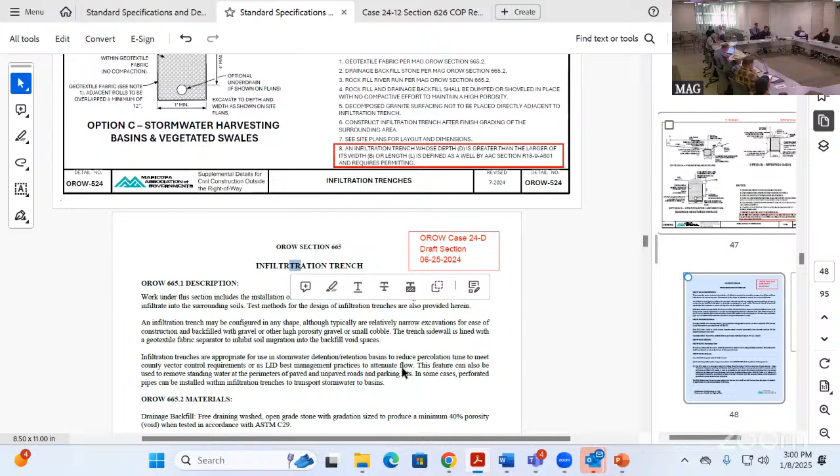Okay, fix the typos. I did share this with my environmental group, and they're really excited about the whole publication, plus this type of detail and whatnot. So I'll be looking for feedback from them. I'll be requesting additional feedback before we go to move it into any kind of voting. That would be appreciated. Our main reason for getting it in this year was so we could proceed with some of the other details that are going to rely on this. It didn't have to get in and pass last year, but we needed to get in and proceed with other stuff that's going to reference back. So we have time on this.

Peter, one question on your boxed note 8. I know we talked about that regarding the definition of what is a dry well. Did you mean to have it defined as a well, or did you mean that to say dry well? Thank you, it's drying well. Dry well, one word, right? Does a well job of drying.

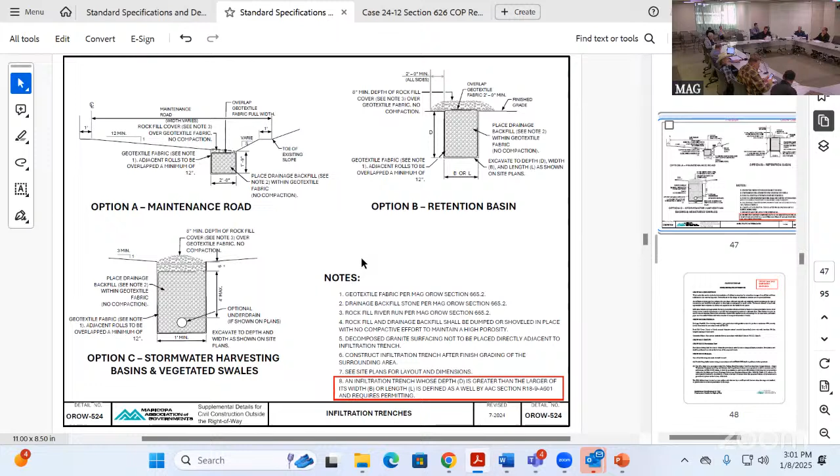Okay, please review this, let's get the changes in there. It's a combination of several different options that were provided by different agencies. And I think one time we talked about even a fourth option, but it was really under pavement, not really outside the right of way, so we were able to exclude that. This is really meant for those locations outside the right of way.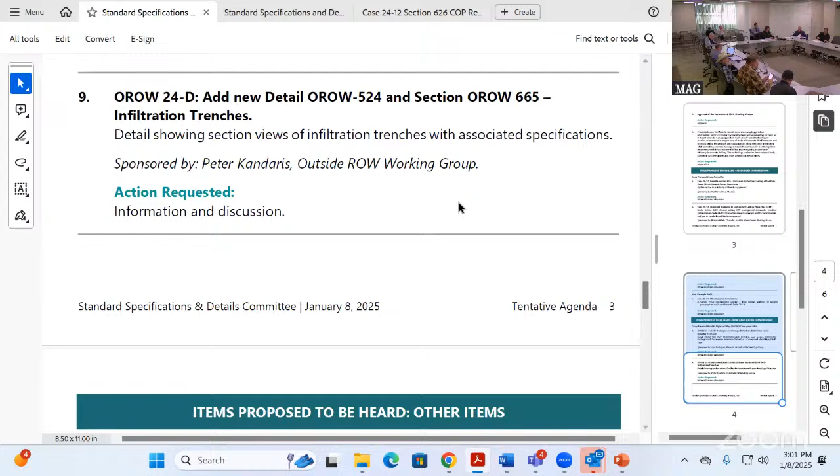All right, any committee members have any questions or comments on this case? All right, not hearing anything. We'll go ahead and move into agenda item number 10, this is working group reports.

So we'll take reports from the Water and Sewer Working Group. Jim, you want to provide us an update? Yeah, Mr. Chairman, thank you. So we didn't do anything after our last meeting in September.

But we are anxious to get started this year, so we will be meeting same time, third Tuesday, which would be January 21st at 1:30. Okay, I might try to go down there in person if time allows. So is that something we could do, Gordon? Yeah, we can set up a hybrid meeting if it's going to work for you. Okay.

And again, we're going to just kind of pick up on some of the ones we've been talking about that haven't formalized into a case last year. Basically maybe a case where we're going to require a manhole bases, cast in place bases to be formed up. We're going to try to keep working and maybe get something on standard for mandrel testing for the sewers. Kind of see if the PEX pipe's going to still want to try to get back in the right of way. I don't know, Warren, was there any discussion on that in the off season?

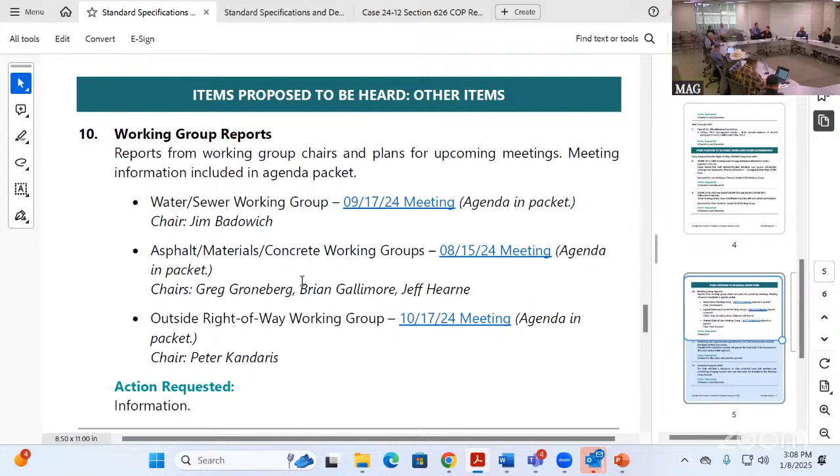Well, when you underpromise, it helps, and then you overdeliver. Well, we'll see how far my wife lets me get away with doing certain things.

So the intent is not to leave the industry. It is to continue supporting the industry as much as we can.

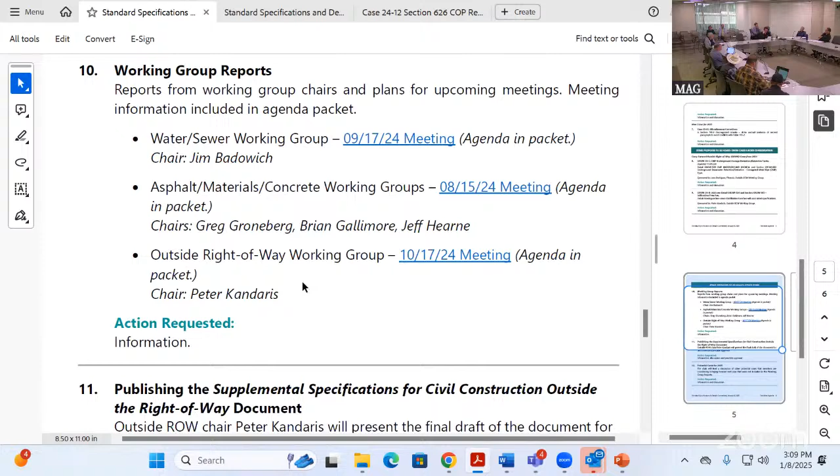We do have our next meeting on January 23rd, I think at 11 o'clock. It'll be a virtual meeting, and I think at that meeting we'll also talk about some other potential cases as they move forward.

Great. Thank you, Peter. And I'm glad you're sticking around for us.

Mr. Chair, yes sir — the other potential working group, did you want to talk about that now? The ADA one? Yeah, you know what, thank you, Warren. Is there going to be a need for a potential working group for ADA? I was going to hit it under potential cases, but let's get to potential cases and I'll bring it up.

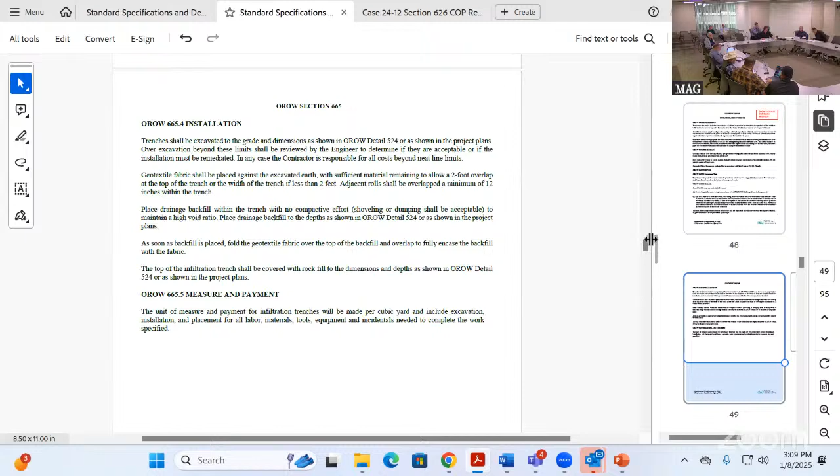We'll move into agenda item number 11, the publishing of the supplemental specifications for the outside of right-of-way document. Hopefully everybody was able to take a look at it and go through it. It's very well put together, in my opinion.

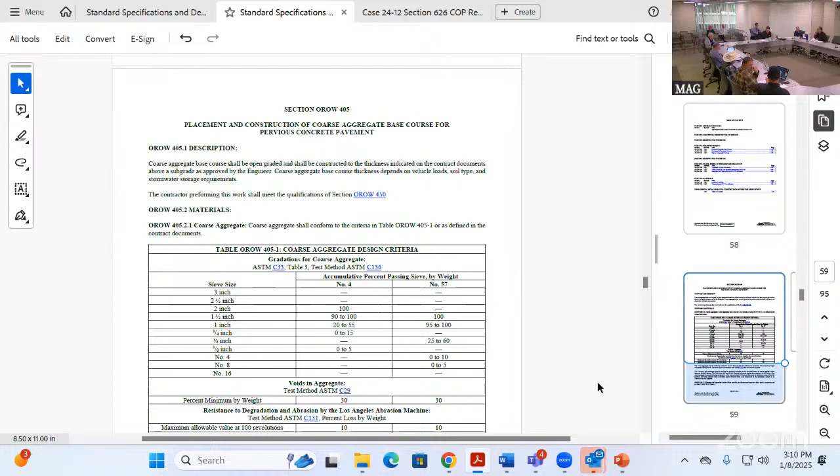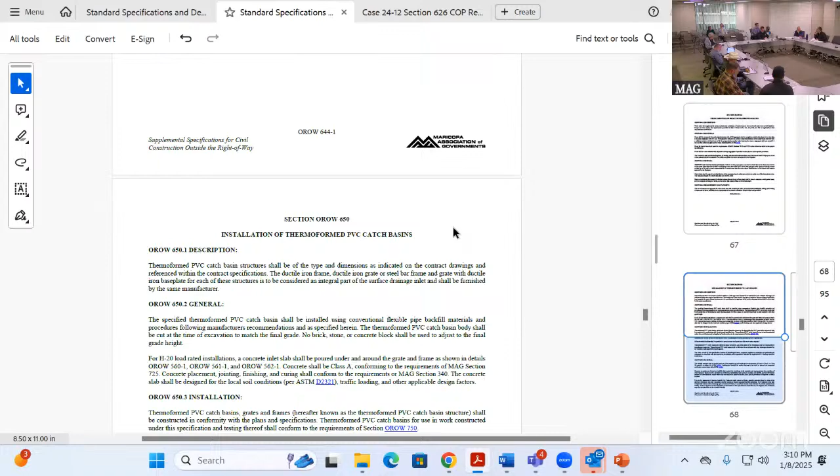I guess at this point, Gordon attached the final draft, the outside of right-of-way document. He attached this, and it basically brings together the final approved version of the specifications, the details, and the new cover. That's correct? Yes. A couple years ago, we approved the idea of the document and things like the foreword. And last year, we approved all the cases that are included in the document. So this document basically brings all of those things together, plus the table of contents, and gives you a final clean layout of all the work that's been done on it so far.

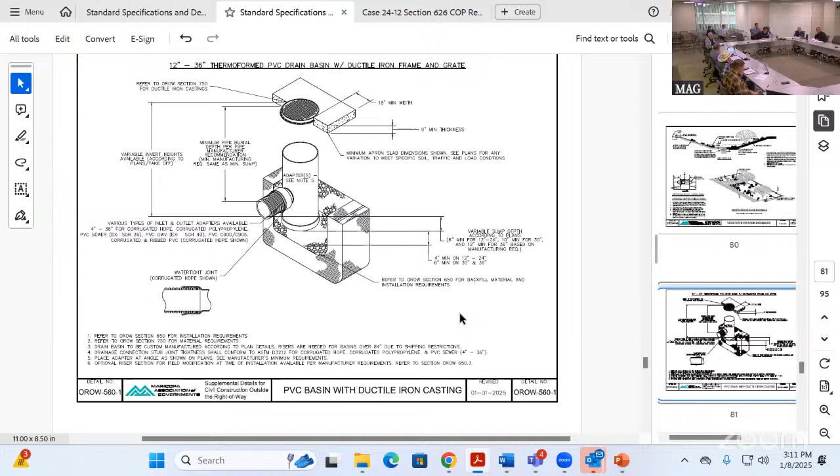So what we're looking to do with this committee is approve this layout and the way this thing is structured and laid out. Is that fair to say? Yeah, I just thought maybe this group would want to have a final approval of the document once they've seen the final version, the final draft. And then we can publish it on our website and make it available for people to use.

All right, let's plan on everybody putting eyes on it. I know it just got put together recently, so everybody put eyes on it in the next 30 days, and we'll revisit this for possible approval at next month's meeting.

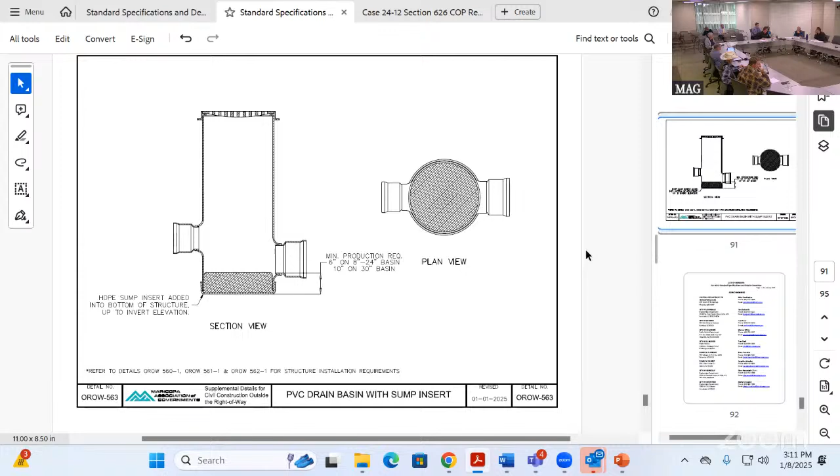So I did want to bring up a couple aspects that everybody talked about before. Start thinking how you want to utilize these with your agency. Right now it's just going to be sitting there. It's not going to be something, as we've discussed before, that's sent up for other approval. It's outside the purview. So there's no rush. You can utilize them as you'd like, or not utilize them however you want. But start thinking about that if you want to have any kind of approval process as this moves forward. Step one is spreading the word, because nobody's going to know about them.

Right. Yeah, I sent this over to my environmental group, and instantly they're in high support of it, but it instantly sparked conversation between engineering and environmental, specifically the pervious concrete, because we've used pervious concrete in Glendale, at a few locations, our park and ride for one, right on 99th Avenue and Glendale Avenue, the northeast corner, and the questions come up.

Well, I don't want to get into the minutia of it, but yeah, everybody take a look at that, and let's look at approving or going through the approval process next meeting. Very good. Thank you.

Gordon, I had a question on this. Does this need to go through the main group of MAG to approve it, like they do with MAG, after we give a blessing? That is a good question. I don't think it's necessary for it to go through. That may be a discussion I need to have with my bosses, is if this is something we want to highlight for our management committee and regional council, just to make them aware that this is available, or not. But that's kind of above my pay grade as to decisions on what's on the agenda of those committees.

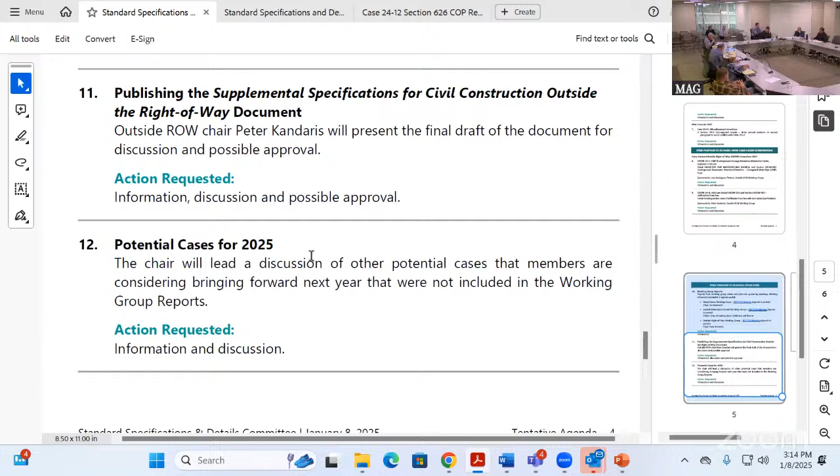All right, hearing none, we're going to move into agenda item number 12. That's potential cases for 2025.

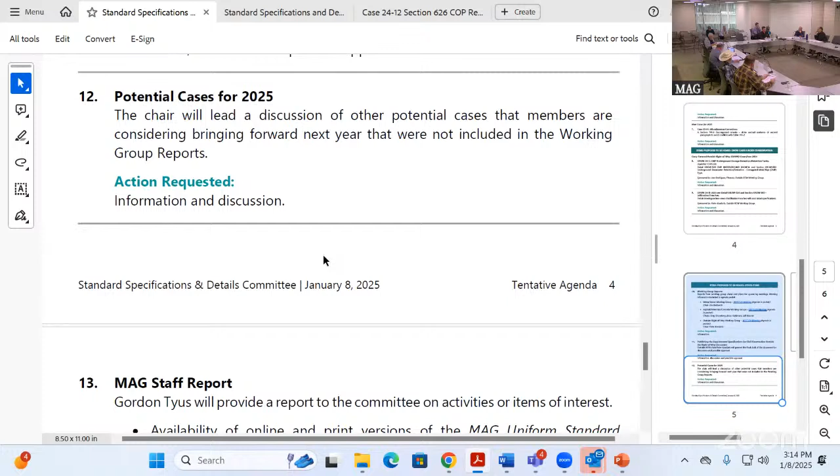This is where Warren and I were chatting about possibly having an ADA subcommittee. I heard last year, in 2024, there were grumblings about some ADA revisions. I believe Warren was working with Craig Sharp from Buckeye, or at least you guys had some conversations. There were some drafts shared specifically, and Craig brought up the modification to the ramp where we don't want pedestrians crossing a certain direction, where you introduce that 2-foot gap.

That's one of the items on the list. But a lot of other potential cases may come out of this final PROWAG, like that particular gap, such as maybe creating a blended transition detail, modifications to some of the slopes changed in the final PROWAG. So I was thinking it might make sense to have that group have an agenda and go through what we think makes sense—new details, revisions to existing details, traffic signal push button pads, whatever. It could lead to many things, but that was the thought.

I like it, and I can certainly rally the troops. Oh, and I forgot to mention, Jose and I have chatted in the off season about maybe co-chairing that, if Jose's still up for that. That definitely, yeah, there is a need for that. I have a Glendale representative that we can get into that committee, subcommittee also. And I've talked to a few engineers offline, and they would be part of that, maybe helping draft the details, things like that too.

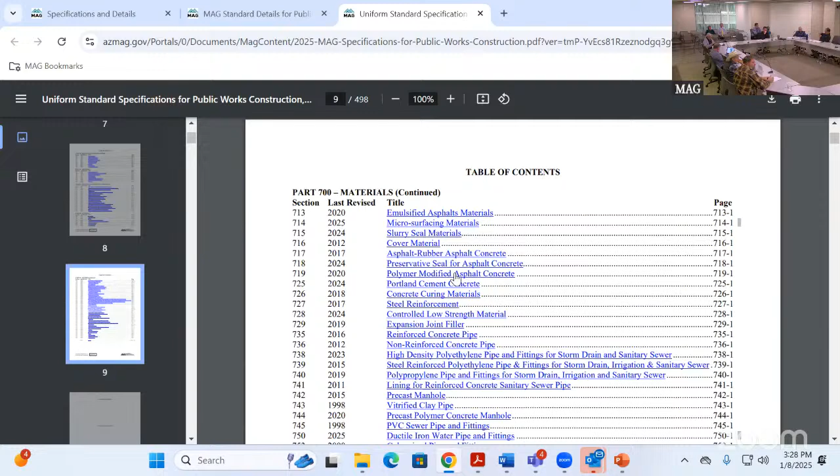Another thing I wanted to let you know is if you're going through the specifications and you come across some ASTM spec and click on it and it's a broken link, because sometimes that happens, let me know and I can fix those in the future. There's so many in there, I don't check them every year, so if something changes and you notice, please let me know.

And that doesn't need to be a miscellaneous correction, that's just a simple email to you, correct? Yeah, it's just an administrative thing, fixing broken links.

Speaking of ASTM, I also wanted to let you know, especially if you're a fairly new member, that MAG does have a subscription to ASTM that we provide to all of our member agencies. So if you need access to ASTM in your office, engineering office, utilities division, or materials lab, just let us know and we can hook you up. It has to recognize the IP address of the computer you're using, and once that's set up, you can access any ASTM you need at any time.

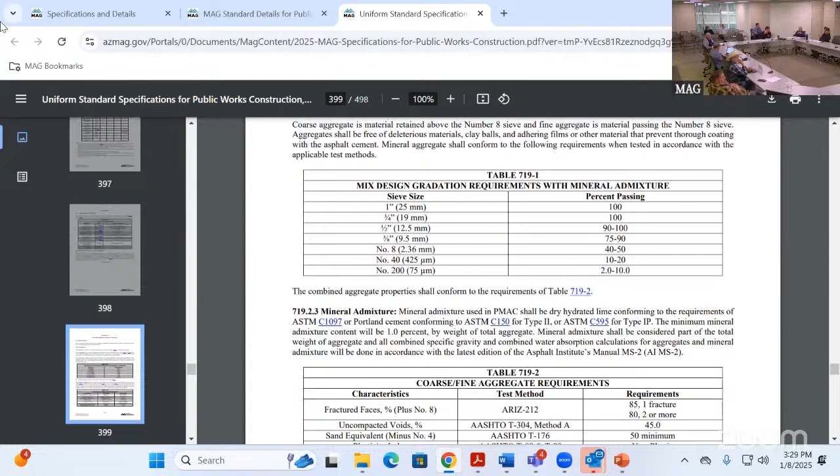The last thing I wanted to mention, as far as the specs and details books, we just got the printed versions delivered this afternoon right before the meeting. Those will be available for sale if you want updated hard copies for your agency. There's a link on this same page that says purchase specs and details book. They're not on here yet since we just got delivery today, but hopefully by tomorrow we'll have an item where you can purchase the new book and either ship it to you or pick it up.